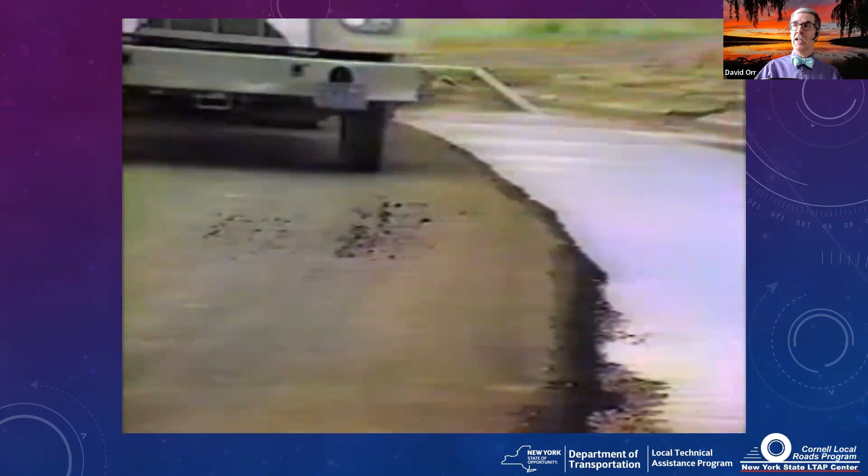The pavement's actually moving under traffic. Every road does this - the more water there is, the heavier the traffic, the thinner the pavement, the more movement you're going to get, the faster that roadway is going to fail. This particular roadway was designed to fail, and they did a good job - it failed in only 81 passes, but it had a high water table and a very thin surface. We need to take care of the drainage - drainage alone would have more than doubled the life of that particular pavement.

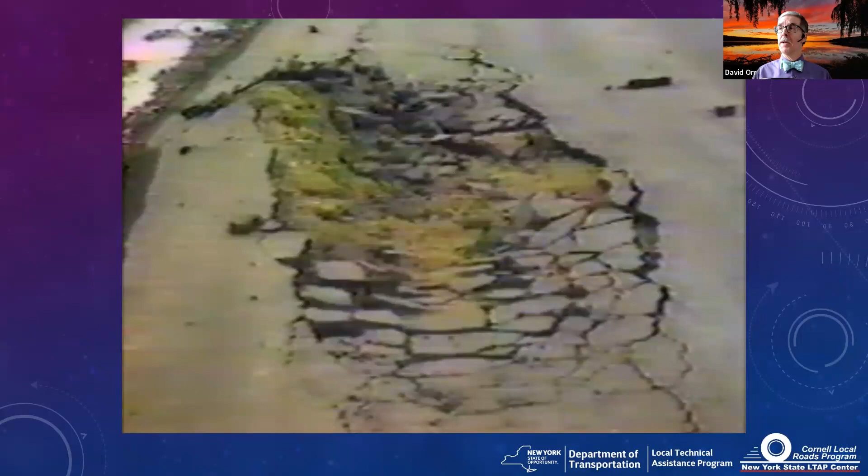You've got to take care of the water. Water is not the enemy, though - it's excess water. For our one hour together we can't cover this a lot, but we can certainly cover it in more detail in the full day workshop. Now, one of the biggest things we have to make sure of is that we've got a good crown on the roadway - got to get the water off. If the water can't get off the roadway, it's going to go into the roadway, and you're going to have excess water. That's going to lead to premature failure.

Now, in terms of the kind of cross slope we'd like to have, well, it depends on the surface type.

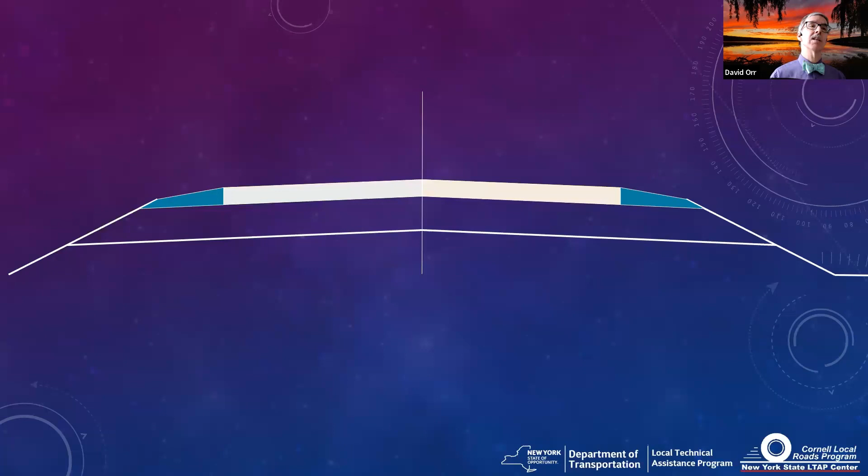So I told you I might ask you to raise your hand. How many of you have gravel roads in your system? Raise your hand if you've got gravel roads that you manage. Okay, we've got... not quite a quarter of you so far. A little under a quarter. Getting close to a quarter. Okay, so about one sixth of you have some gravel roadways.

For a gravel road, you're going to need a steeper cross slope to move that water off to the side. You're going to want about a 6% cross slope for a flat, straight section of highway. For those who care, that's three quarters of an inch per foot.

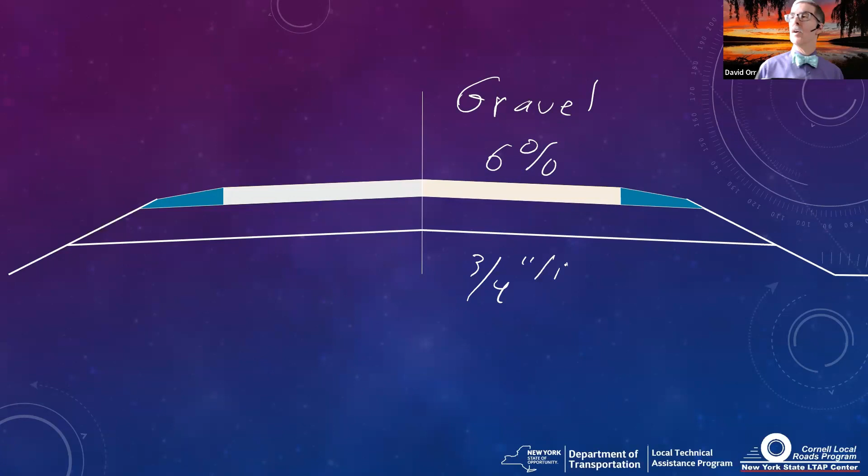But if you've got a paved roadway, you don't need to be so steep. In fact, if it's too steep, you'll get erosion at the shoulder. So typically we say 2% for a hot mix, maybe 4% for a chip seal or cold mix. And of course the shoulders should have additional slope. For those who care, 2% is a quarter inch per foot, and 4% is half an inch per foot.

One of the things that's cool is whatever the surface, the same cross slope can be used for the subgrade and it'll still carry the water. It does make a difference. You definitely want a cross slope on those lower layers. This is very important for a couple of reasons, not the least of which is drainage, which is what we're talking about today.

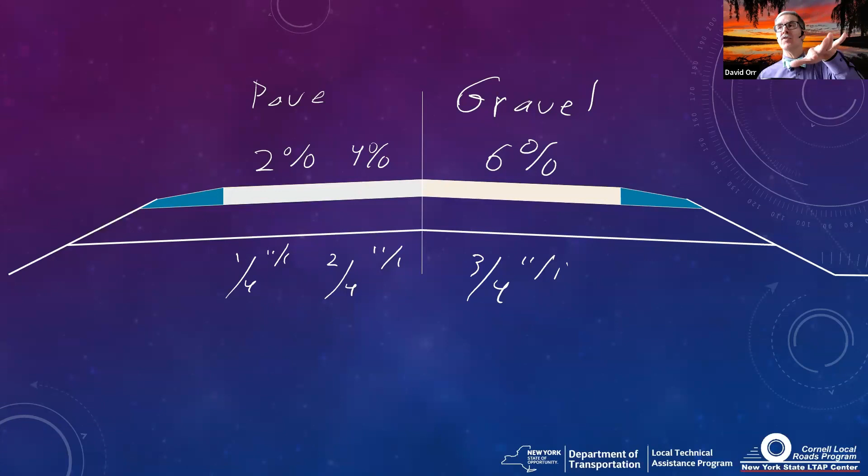You don't have that crown, you don't have that cross slope. Somebody has come in and flattened it, or you've transitioned around the corner and made a flat spot, or made a bread loaf shape where you've got a flat middle and steep sides. Anytime you get a flat section in a gravel roadway, you're going to get potholes. They're much more likely to form when you've got a flat section of highway.

You've got to have a crown. There's nothing in the rules that says you can't have a crown going all to one side if need be, especially on a gravel roadway. Obviously it would depend on the width, but you've got to get that water off.

Now, if you're interested, if you really want some good information on gravel roads, we have some links on our website, we have some videos. So if you have gravel roads, for the six of you that do, there's some pretty cool stuff out there, and there's lessons to be learned.

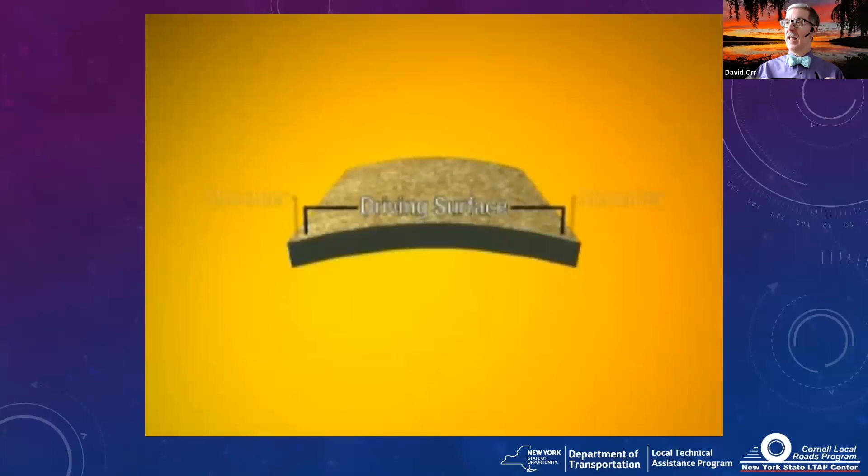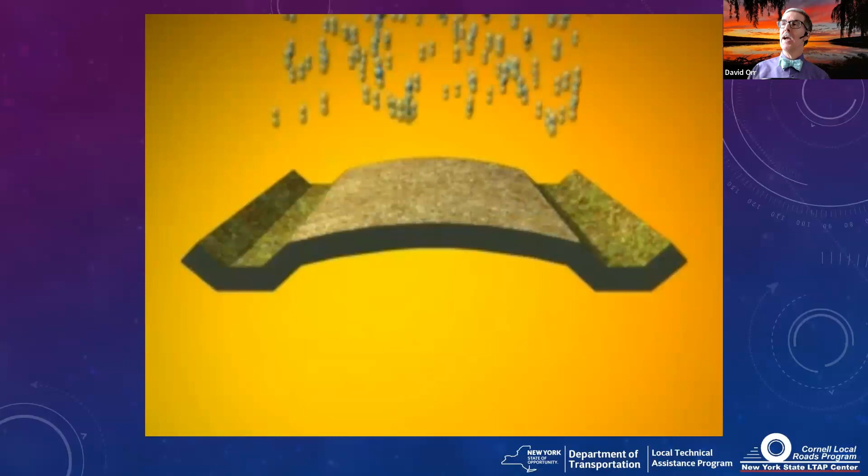Now, one of the biggest things with a gravel road is you've got to have the correct shape. Here's an illustration from our friends at the South Dakota LTAP Center. A gentleman who's since retired, the guru of gravel roads, talks about the danger of having that flat top surface on the gravel roadway and the quality of the gravel throughout this particular DVD. But you've got to have the same drainage pattern on a gravel road that you have on a paved road, though you'll have a slightly different surface because of the way water runs off that particular surface.

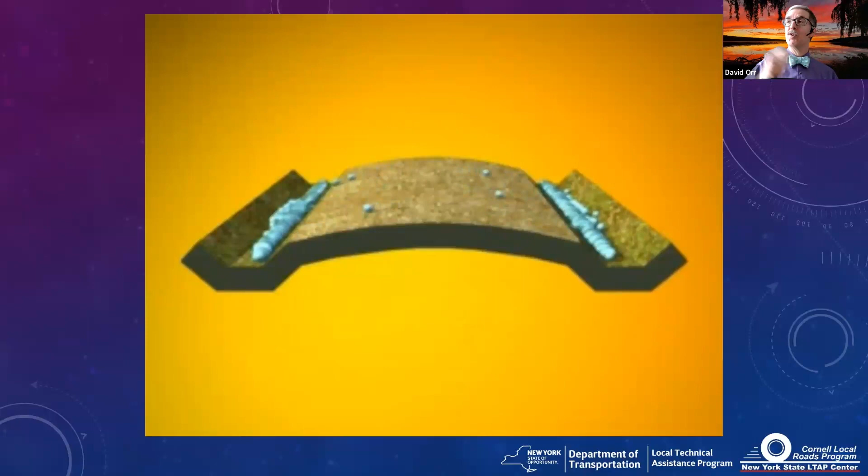So keep that in mind. And of course, we always think about safety. When we do drainage classes, we think safety. We do safety classes, we think about drainage. Those two things really are important to think about.

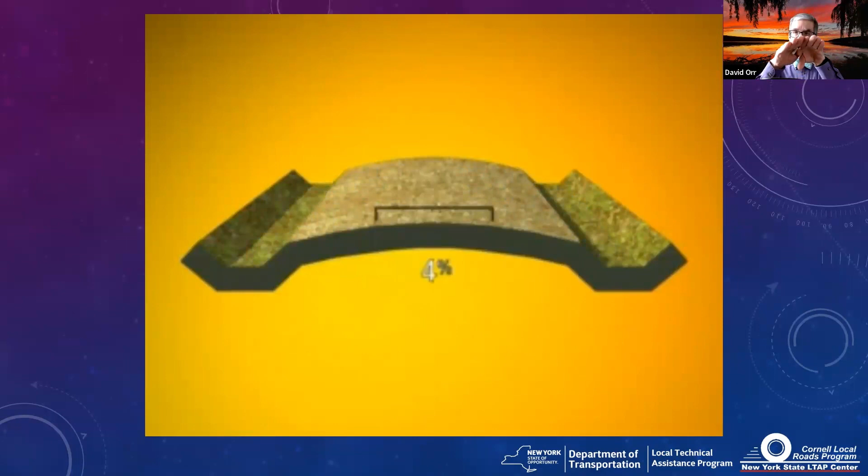So again, make sure you've got a good crown, make sure you've got a good slope, and especially on a gravel road, don't get yourself a flat spot in the center, or you're going to leave yourself potholes. Heck, even in this video, they sort of show a rounded shape, which tends to lead to potholes.

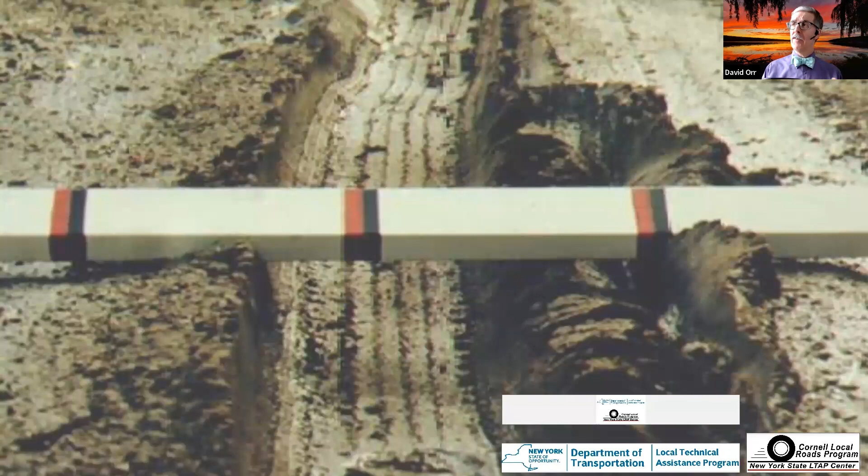You can see it's pretty deep. The only saving grace, the only reason I didn't get in worse shape, was I went slow. I went back and checked, there was no gravel in there. The material had clay, mostly silt, and a little bit of sand, but there was nothing larger than a quarter inch in the whole pack. It was just a mess.

So when you're looking at your roadway, you really need good quality material. We spend a lot of money on asphalt, and asphalt is not cheap, yet the real money needs to be spent on the gravel, because it's cheaper and easier to manipulate. Part of the problem, of course, is getting good gravel, and that is getting harder.

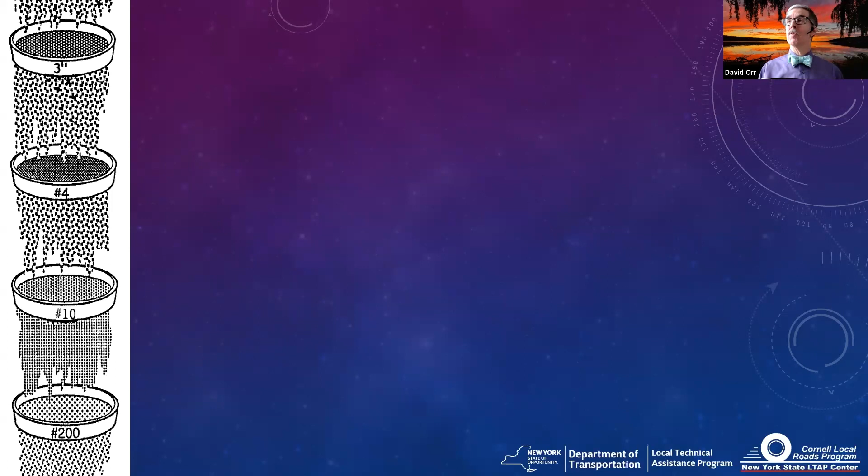If you look at it from the standpoint of your gravel, sand, and your fines, silt and clay combined, essentially what you need, no matter what, is about 50 to 70% gravel, okay? So that's this section over here. You need 50 to 70% gravel. That's the good stuff, that's what you drive on, essentially the 1/4 inch to 3 inch material.

Those are the rocks you're actually driving on. Even in a hot mix pavement, you're driving on rocks, okay? You need about 25 to 40% sand, to fill in the voids, still pretty good for drainage, good shape, right?

Now, in terms of silt and clay, you need some in your gravel roads. Those who raised your hands earlier, for your gravel roads, you need some silt and clay because that's your binder. That's what's holding it together, because in a dry period, if you don't have that, traffic is just going to cause it to ravel and move, creating washboards and other problems.

The problem is those fines hold water. And if they hold water and you cover them over with a surface, that water can't go anywhere. It can't evaporate out, and it just sits there and becomes excess water, and the roadway becomes too soft.

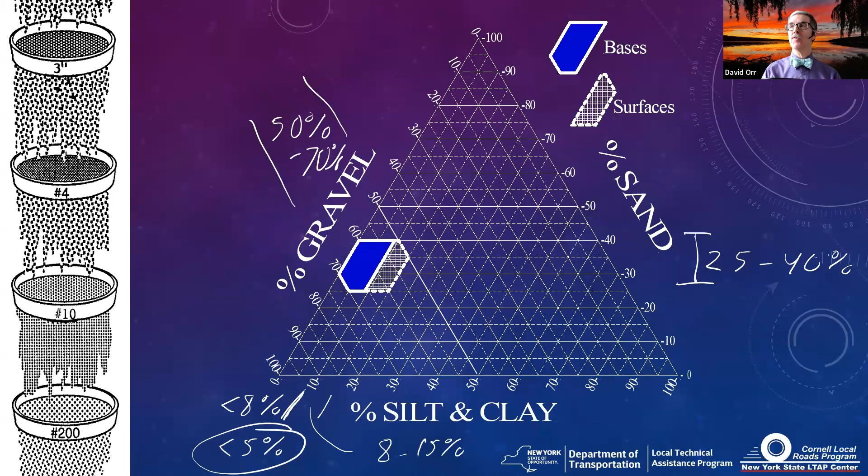You might find your fines content is higher than you'd like it to be. Okay, absolutely vital for a good roadway. And with the proper drainage on the side and the proper material, roads can last for a really, really long time with a relatively thin pavement.

And of course, as you'll hear next week in the pavement maintenance webinar, and by the way we have that workshop on the road as well, you've got to do those treatments sooner rather than later. The treatment here is not to overlay this. It's too late.

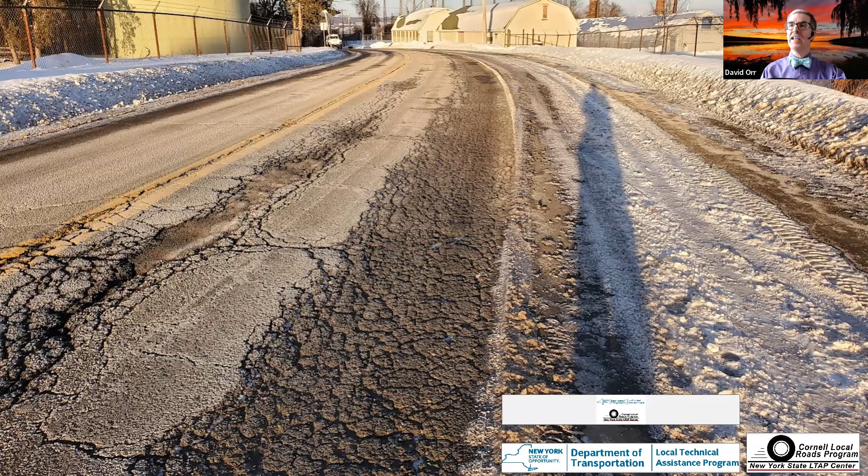You're really going to have to grind that material out, check the drainage underneath before you do anything on top, because those cracks will come right back through. About 1 year per inch for your overlay, and at over $100,000 per inch per mile, that's a lot of money.

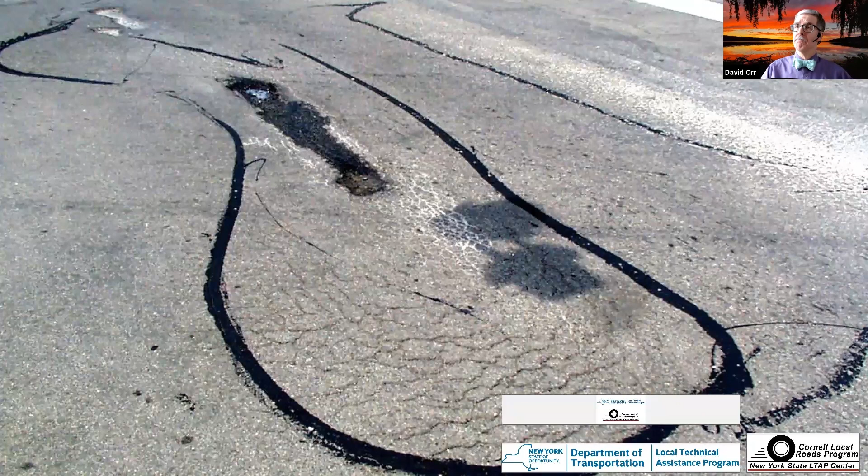Okay, so this photograph was taken on a road. I won't say where the road is, but in the Q&A, somebody tell me what you think the agency who owns this road did the day after I took the photograph. See if somebody in the Q&A wants to tell me what they did the day after.

They filled the pothole. They should have filled the pothole. They didn't. They should have patched it. Resurfaced. Somebody got it, yeah, they resurfaced it. They overlaid the thing the day after.

And the worst part is, the part that some of you caught, is the fact that, let me get a color you can see. I'm going to go with yellow. Okay, right there, that's not just a pothole. That's actually water, there was actually water coming out of the roadway, and they overlaid it. Of course, it came pretty quickly, just a few years, and it became a pothole again.

Okay, I'm a huge fan of crack repairs. We don't do enough of them. This is not a good candidate for crack repair. As you'll hear more about next week, and if you come to the workshop, you've got to have relatively thin cracks. You've got to get to them sooner than you might like. It's absolutely vital to do the right repair at the right place at the right time, and to do it well.

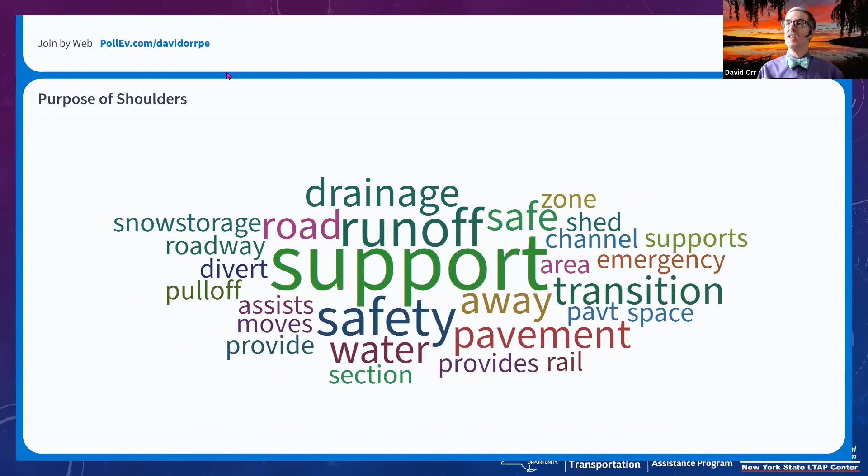Number 1, they provide lateral support. Compacted shoulders hold the pavement in. Otherwise, you get edge cracking on the asphalt. Even in an urban area with curb and gutter, that properly placed curb provides lateral support for the pavement. Number 2, it moves the water away from the roadway into your slopes and stuff like that.

In fact, let's go look at a good shoulder when we talk about this. And then, obviously, we've got the issue of snow storage, in most winters we have to deal with snow. But I'm glad somebody put safety in there. Shoulders are a part of the safety of the roadway because, let's face it, people get off the roadway. They're driving with this tool in front of their face, okay? They errantly pull off. One mistake shouldn't lead to a serious crash or fatality.

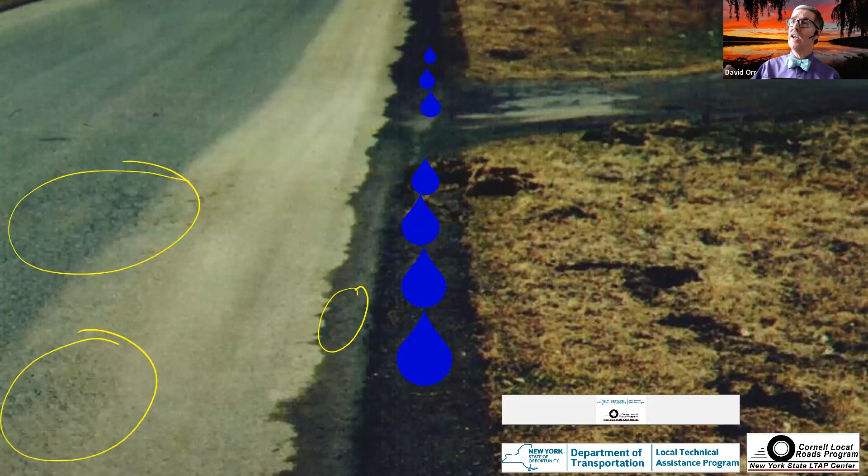You can actually see where the edge of the snowplow was, but you can see the water is actually going back under the roadway. You can see that it's saturated here, okay? You can also see, if you look carefully, there's a couple of spots that have already started to crack. Very light, fine cracks, but those are going to be potholes relatively soon. And then, of course, all this debris.

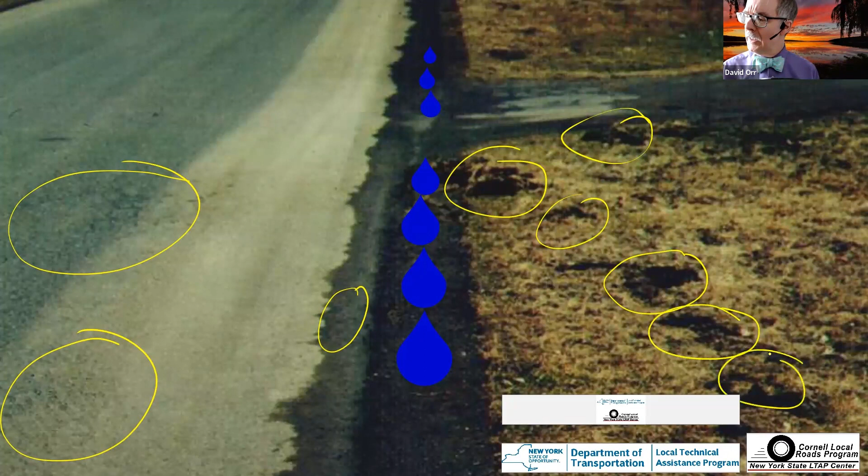Before I was with Cornell, I was with Yates County. And there are a lot of things I miss. I really liked the job. One thing I never miss, though, is that phone call from the irate homeowner. And you can't defend that. You can't say, well, you just have to go clean it up. You just have to take it.

So cut their shoulders, get them off the roadway.

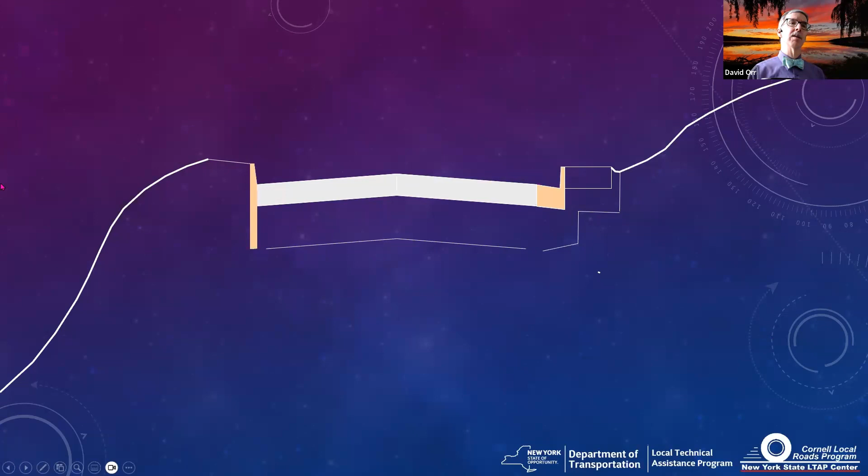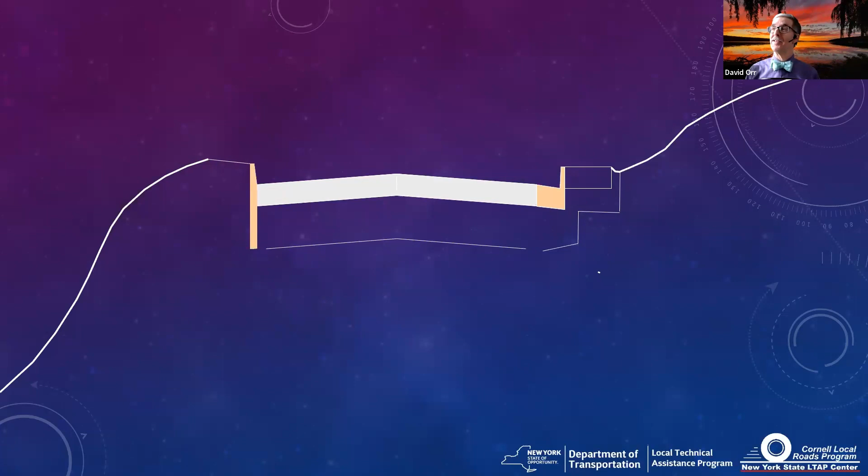How many of you have curb and gutter in your system? Raise your hand if you've got curb and gutter you deal with. And again, you may have gravel and curb and gutter. I'm okay with that. That's actually fairly common, more common than we think. Heck, the city of Ithaca has roads that are dirt and, of course, shoulders and curbs. Okay, so about a third of you are raising your hand that you've got curb and gutter.

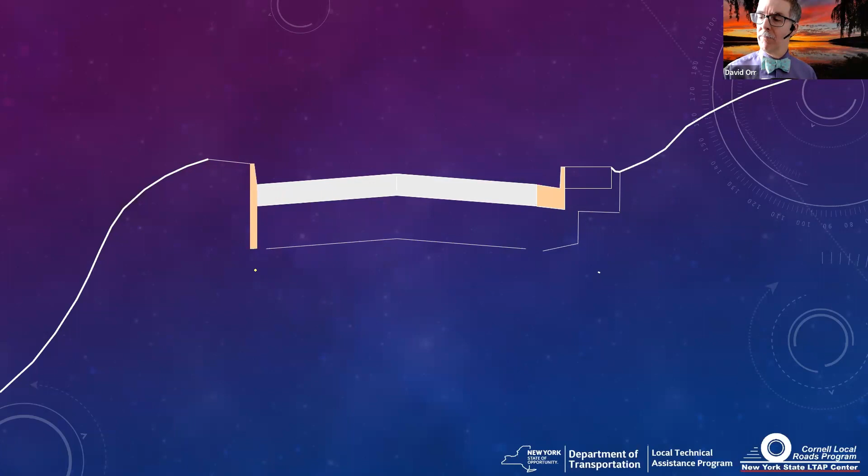Same drainage patterns occur when it comes to dealing with curbs and gutters, okay? So you still want to get water off to the side. So maybe you want to go ahead and put in some subsurface drains underneath, to drain the water off, because you still want that water to go off to the side. You can't put it into ditches, so you got to put it into subsurface drains, okay?

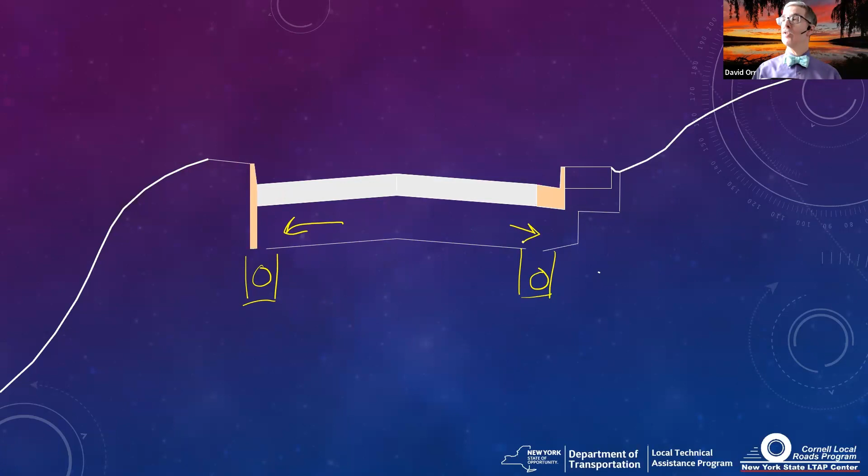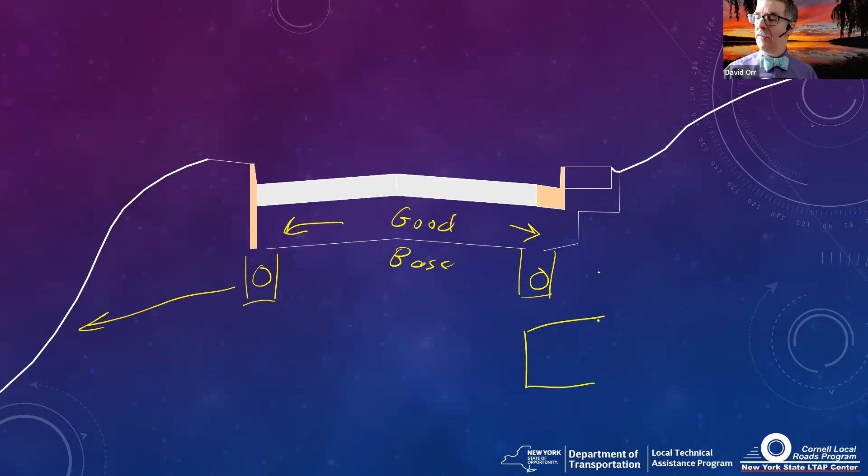You still want to use the same quality material here, okay? So you want to have a good base. You still need to have a cross slope. You still need to take that water away. All the same rules occur. The only difference is with a curb section, where you take that excess water that gets into your roadway is your storm sewer system. So you're going to either have to find a way to outlet these, or you're going to have to feed your subsurface drains into your stormwater system.

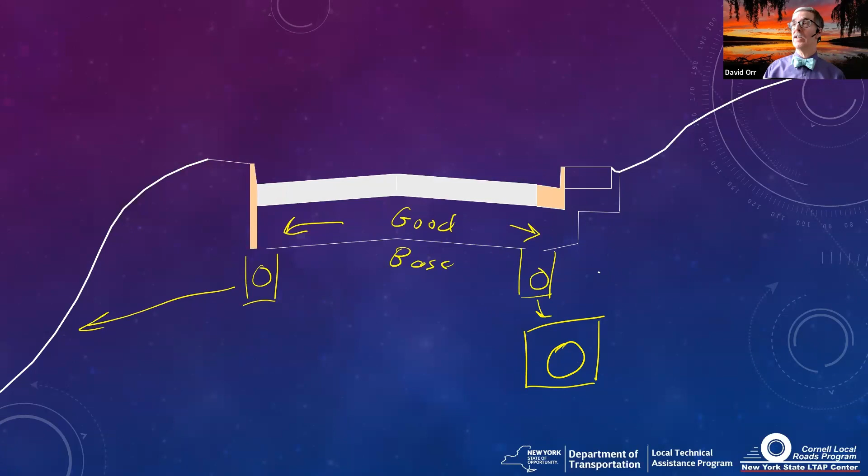Just be aware, however, if you need animal guards, you might want to put some screens or animal guards because the critters like the end of plastic pipes. They go up them pretty easily, okay?

So in terms of the quality of the AC, it doesn't really matter, okay? So now somebody put in the Q&A talking about porous asphalt. We're not going to talk about porous asphalt too much today, but you may have heard that term. Porous asphalt essentially is a special mix that lets water go through it, okay?

It's usually used in parking lots, though if you go up to Lake George, you'll see a whole stretch in front of the beach that's all porous asphalt. They have to have special subsurface catchments to take that water and put it into the stormwater system. It becomes part of the drainage structure.

Has to be designed well. You got to keep the surface clean. There's ways you have to treat it in the winter. You don't want to plug up the pores with sand. It can be part of your drainage pattern.

I wish we had time, but we got one hour together. Something to think about: porous asphalt can be used. We have a couple of parking lots here at Cornell that have them. The big thing there is that they're not huge fans of a lot of turning movements. So in a parking lot, be a little wary. You might want to make the aisles regular pavement and porous where the people park. But it's part of the overall process to deal with.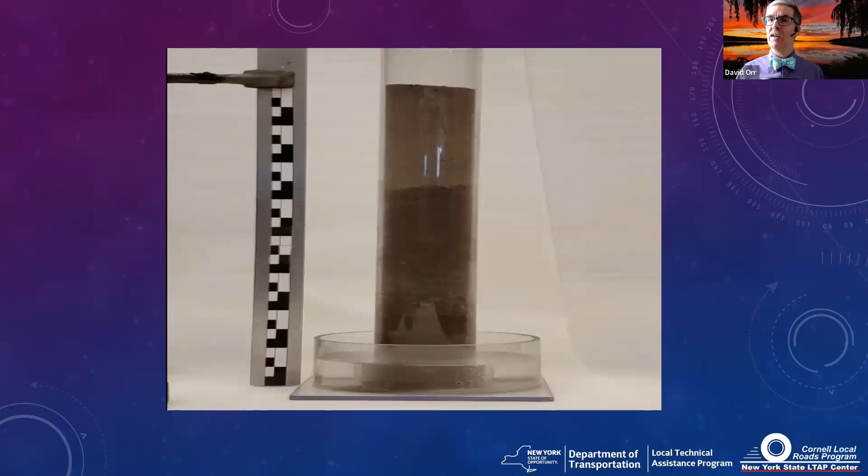Now, just to illustrate this in terms of the lenses of ice, this was done by some colleagues in the Army Corps of Engineers. They have a freezing cabinet and do the same experiment, but this time the top is below freezing and the bottom is above freezing. Watch what happens now to that same water that gets pulled up—remember, the water is getting pulled up from underneath.

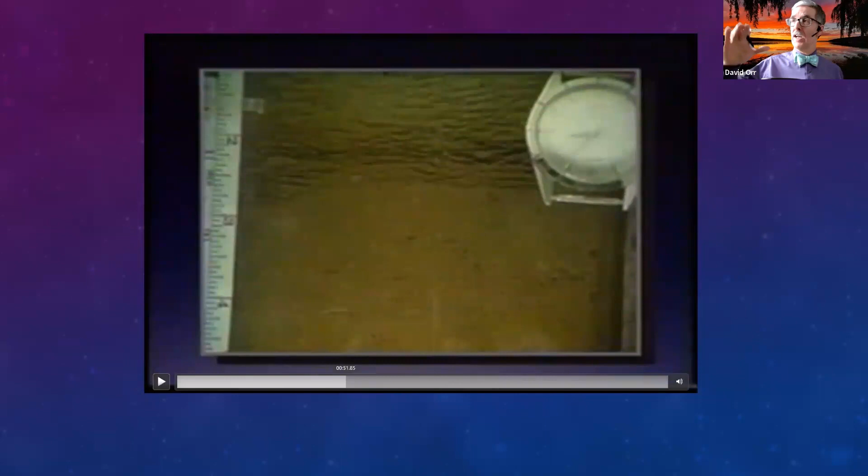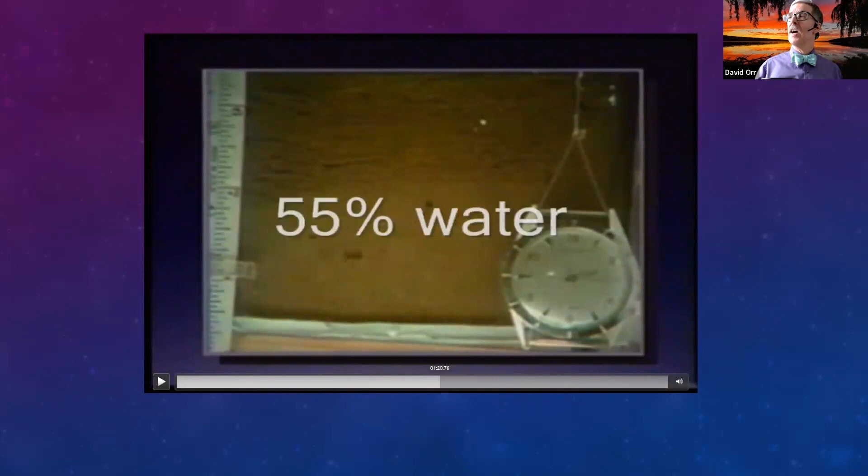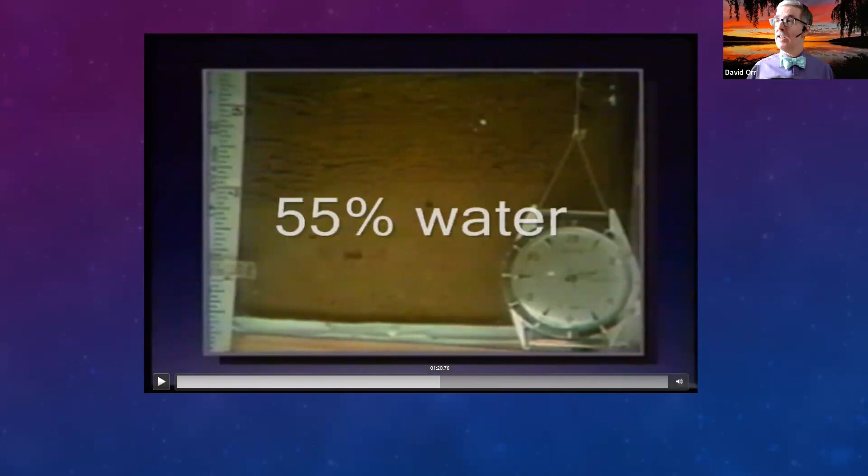Okay, I'm going to skip just a little bit ahead. This starts out at 19% water content. You can see the lenses of ice being formed. And what I want to do is notice at the end of the experiment, they went from 19 to 55% water content. All that's just water that gets pulled up. At best, it would heave 10% if it wasn't for this capillarity issue pulling the water up, and the freezing coming from above.

And then, of course, you can get a lot of heaving, 4 inches out of 6, that's a lot of heaving. But notice, let me go into here.

Now, what roads are frost susceptible? Well, the roads that are frost susceptible have to have freezing temperatures. They have to have the material that is frost susceptible. And lastly, you have to have free water available, capillarity, pulling the water up.

Now, how far does that happen? Well, if you've got silts and clays, it could be feet. A silt will pull water up 5, 6 feet with no problem. Clay even more. So if you got free water near the surface and you got cold temperatures, you can get frost heaves. And you could just put signs up, but we can do better than that.

Now, in terms of what we can do, we have to think about the situations that we're in. This happens to be in Thendara, Old Forge, whatever you want to call it, up in the Adirondacks. I took this photograph coming back. The state had just paved the roadway.

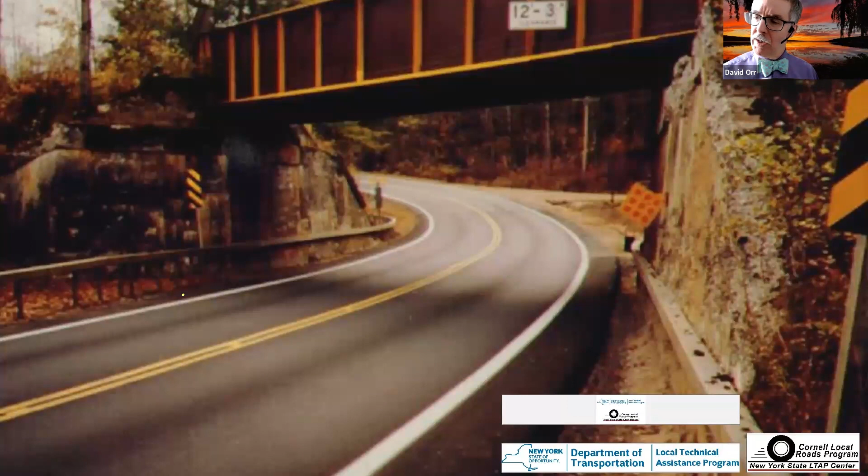Now, this is a tough challenge. I always thought the state had a really almost impossible challenge, because if you know this particular site and just look at it carefully, I'll help you out, you can actually see there's a culvert that runs diagonally right there. It's a shallow culvert, a box culvert actually. It's not moving when frost heaving occurs. It's not going anywhere. The problem is the ground around it, the subgrade material, the native material, tends to heave and move, especially in the winter.

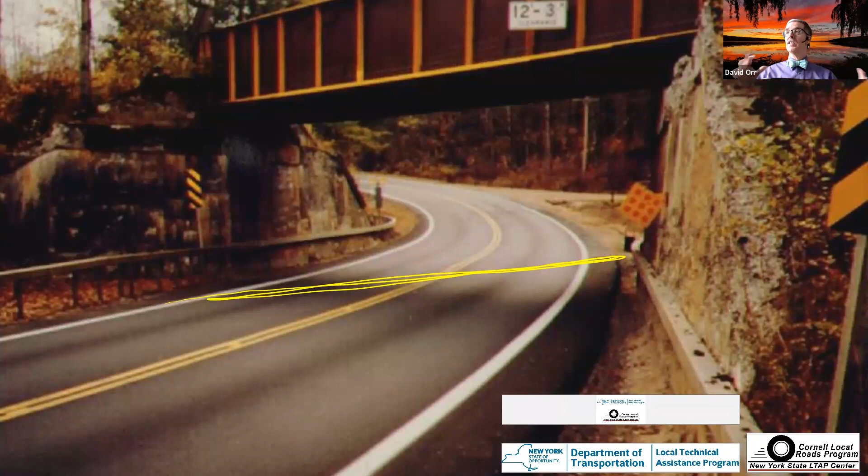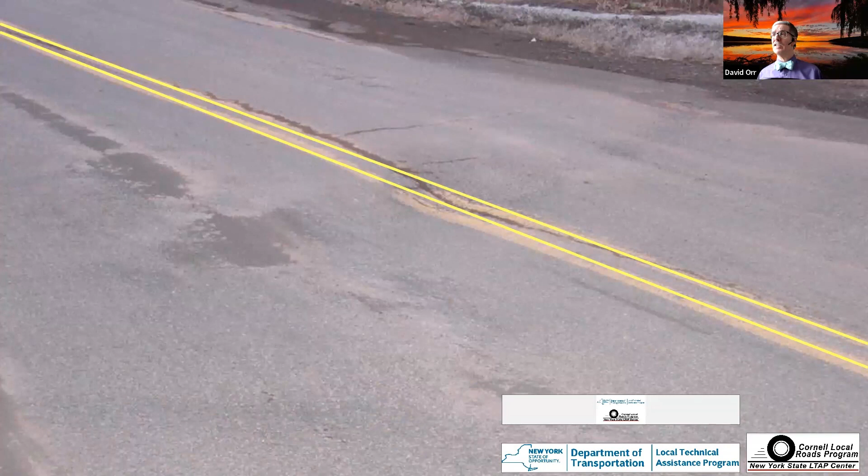And this can occur for a lot of agencies. Here's an example of one on a town road. Actually, it might even be a county road because it does have a yellow stripe on it, but I don't think they painted the yellow stripe with a dip in it. It occurred because of this capillarity creating frost heaving. The culvert didn't move because we backfilled it with good material. The road around it moved, and we get a problem in the winter.

Now, how do we solve this? The best thing to do would be to use non-frost susceptible materials. That would be optimum, we'd love to do that. And non-frost susceptible goes back to our chart, that's why I showed you the chart. What we found was if you keep that fines content less than 8%, most of your frost heaving problem goes away. Most, not all, but most of it. Now, of course, it still holds a little too much water in some cases, which is when we really like 5%, but 8% gets rid of most of the frost problem.

But if we go back up and look at our example with our culvert installation, how you install that culvert matters as well, because if you use really clean material that doesn't move, but the ground around it still moves, you can still get a differential movement. So how you backfill the culvert, use the same material, spread that out with a large excavation. There's lots of things you can do to reduce that frost heaving that's going on in your particular case.

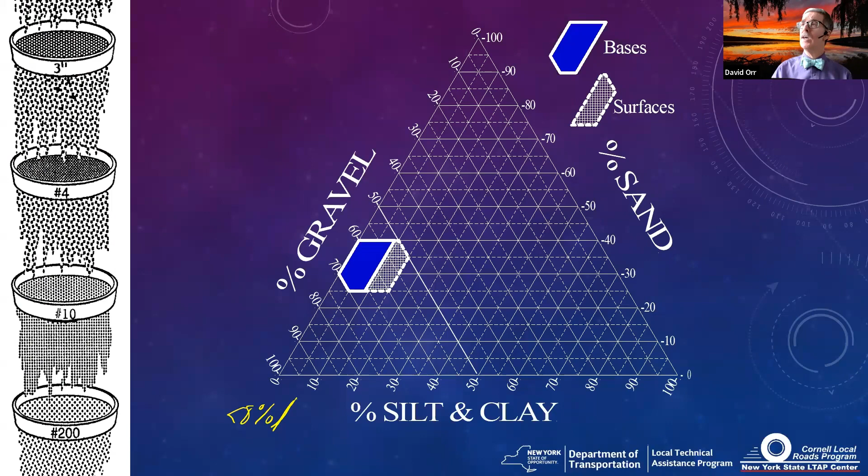Keep these things in mind. Now, in terms of the quality underneath your roadway, another reason we like to have good quality base is we don't want to see this. This is spring. If you've got a roadway that looks like this every spring, with potholes that don't seem to last no matter what you put on the surface, you might want to go and check what's going on underneath.

Check the gravel. Now, when are pavements strongest? That's a question we get asked quite often. Are pavements strongest in the summer? Actually, no. In a normal winter, your pavement's strongest when it's frozen.

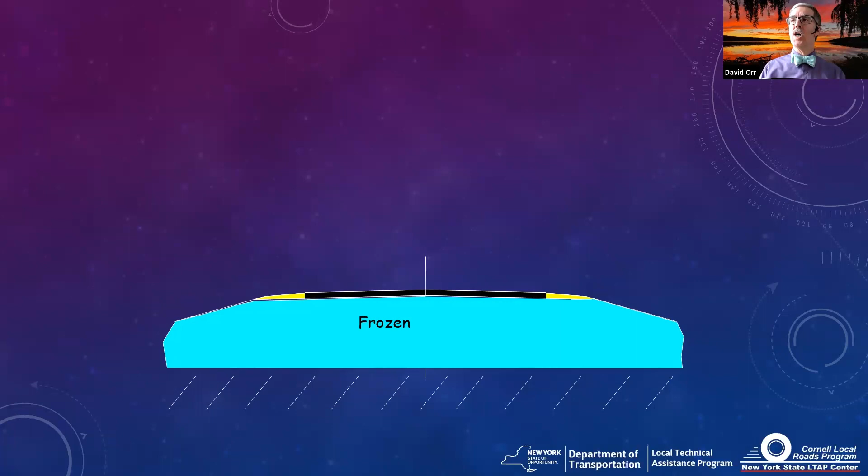You can drive a truck over a lake, and they did that during World War II, and you've probably heard of ice road truckers up in Canada. When it's frozen, roads are really, really strong. The problem is if there's a lot of capillarity, if there's a lot of silt and clay that pull the water up, that water has actually saturated the soil. It's frozen, but it's got excess water. And when it thaws in the spring, it doesn't thaw nice and evenly. All that water sits in the roadway, has nowhere to go until it's completely thawed.

Now, in the Q&A, let's see if somebody can tell me why do I show the shoulders taking longer to thaw than the main line? Which is the most common thing you see. Why do I show the shoulders staying frozen while the center thaws and you got all that extra water? Why do the shoulders take longer? Some of it's due to the sun, it heats from the top down.

More exposure to cold because you've got a black surface and the shoulders don't have that. There's no friction from the traffic, there's no heat from the traffic. There's two more things I'm looking for, let's see if they pop in here. We store snow on it, and that actually helps insulate and keep the pavement frozen. That snow storage can help keep it frozen. Okay, that's one. Blacktop heats up faster.

And then the other one, we did this for decades, it was the standard for many old roadways. Whether it's good or bad, the standard was when you built the roadway, the material in the shoulder didn't need to be as good since there was no traffic. So if I did a cross section, I'd have good material here, pave over that, and put poor quality shoulder material down because it's only the shoulder, right? And then I pave the whole thing.

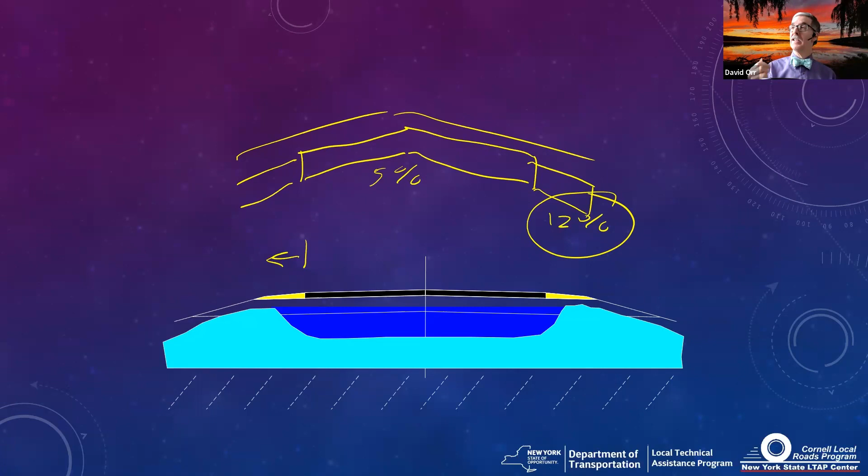Well, the problem is, if this is clean and holds only, say, 5% fines, good clean stuff, but this over here is 12% fines, cheap stuff, the water can't get out, and it's going to hold more water, stay frozen longer. So it's a catch-22. And of course, where's that water going to go? Well, it's going to lead to potholes. It's going to take care of all kinds of issues.

It could do this. We got this picture from Jim Markle out of Albany County. I said, is Jim on here? I wonder if Jim's on here. Let's go see if Jim's on here today. He sometimes shows up. I don't see Jim on there today, but Jim, thank you for the photograph.

This is a frost boil. Essentially, in the spring, you get water coming up and it comes right out in the roadway. And it's pure water. Remember those pure lenses of ice? When they melt, they produce pure water, and that's pure water coming up. So you've got to take care of what's going on underneath.

Now, there are some other things you can think about. Sometimes we have to build across some really soft soils. We know that, that happens. Big deal. There are things we can do. We can spread that out. We could build a corduroy roadway.

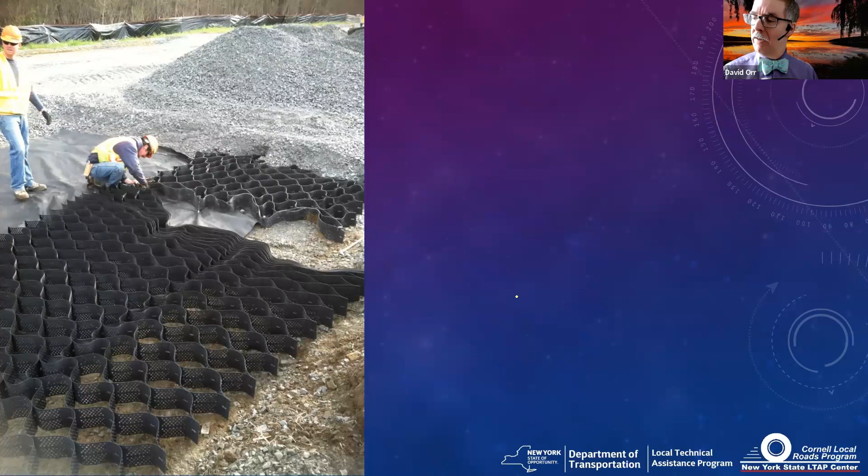This is the modern version of the corduroy roadway, where you put in a geocell and you backfill the geocell with gravel. I actually like that technique, it's a pretty cool technique. The only thing I don't like that I see here, essentially when you're building the roadway, you come in and put in the geocell to spread the load out. So you've got your subgrade, you still want a cross slope on it, and then you put this geocell material down, and then you backfill that with whatever gravel.

Doesn't have to be the nice clean stuff like you see in the photograph, though I'm not sure how clean it really is. The thing we recommend is underneath, and let me change my pen color so you can see what I'm talking about. I'm going to make that light green.

What we recommend is you actually put fabric between the subgrade and the geocell, and go beyond the geocell. Because any fines you've got might pump up and contaminate whatever's in your geocell, and if that happens, or the geocell gets soft, it can actually roll over. So you can see they did put fabric here, but they really should have extended that fabric out beyond the edge of the geocell. Then you fill that in, you build your road on top of it, and it's a modern version of the corduroy roadway.

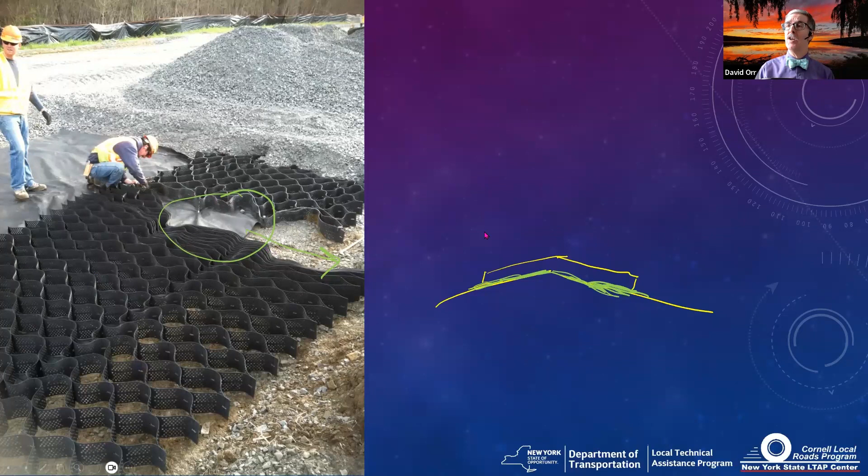Now, you don't have to use fancy geocells. You can just do it with fabric and big rock, a drainage blanket layer. That can actually work pretty well. The biggest concern is you still want to think about drainage and compaction.

In this particular case, the rocks that they used were cheap, but they weren't crushed, and so they really couldn't get them compacted because the subgrade was really soft. So they tried to put in all the rocks, and the green's not going to show up here, so let me change the color. We'll go with black here, because I can actually see that.

They tried to put in rocks that were like 8 inches thick, then they put a gravel layer on top of that, that was at least 6 inches and probably a little bit more. And they tried to compact 14 inches of material. I don't care what roller you've got, 14 inches of material is a lot to compact, and you're not really going to get the compaction that you want. Eventually traffic will finish the job of compaction and you'll get some rutting, because of course it only compacts in the wheel path. So this is something to think about.

Make sure you can construct it. And of course, whatever fabric you do use, make sure you're using the right kind of fabric. There's woven and non-woven fabrics, and again, we can have a long discussion about that. The big key here is make sure it's puncture resistant, and make sure you understand what its purpose is for separating and keeping the fines out of your roadway. Because the one thing you don't want to do, like they had to do in this operation, is dig up brand new fabric. It's a pain. So you really want to put in the right material and do it right.

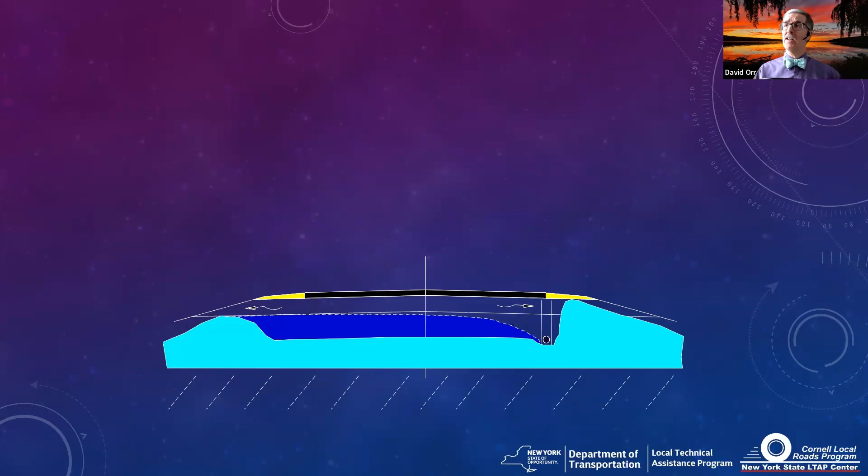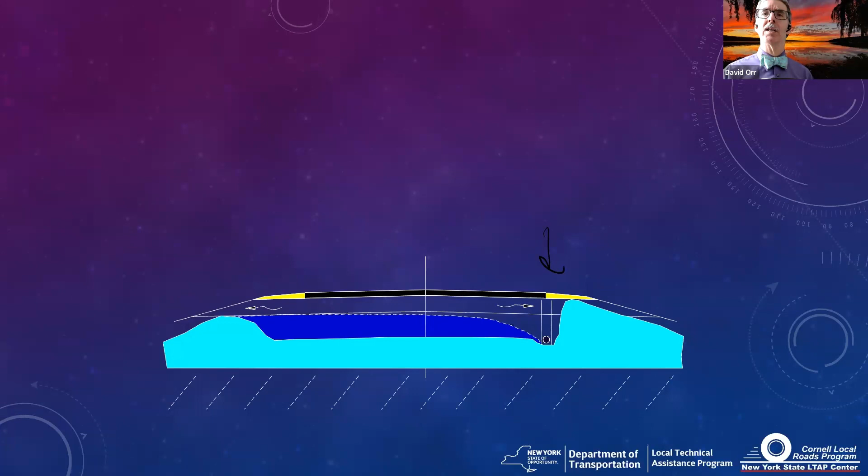Now, one of the things we can think about doing is doing some kind of subsurface drainage. In urban areas, we talked earlier, you have to do that. Subsurface drainage can be very helpful, okay, that you see like right here. Oh, dark black on blue doesn't work too well, does it? Let's change that to white again, or yellow. So a subsurface drain could be very useful right here.

You could also put in the same quality material in the shoulder, a free draining layer. That will help. You'll still get some thawing slow down in the subgrade, but it can really help the base to drain out to the side. And it's cheaper in the long run if you can put it in, if you're not in an urban area or something like that.

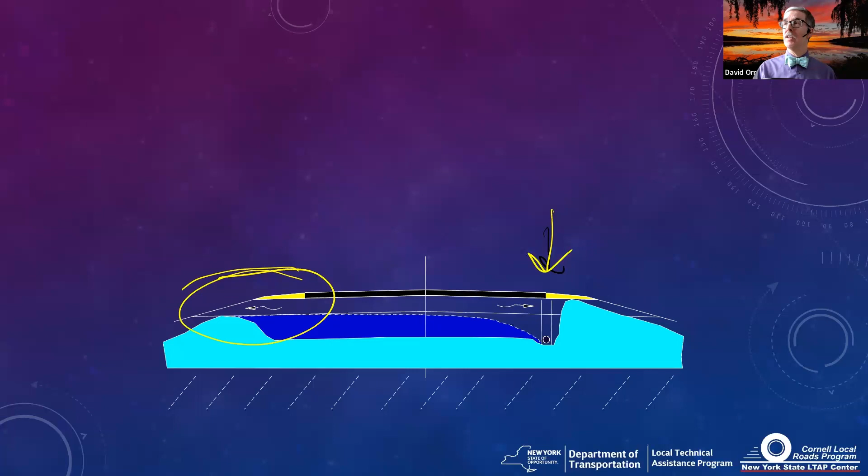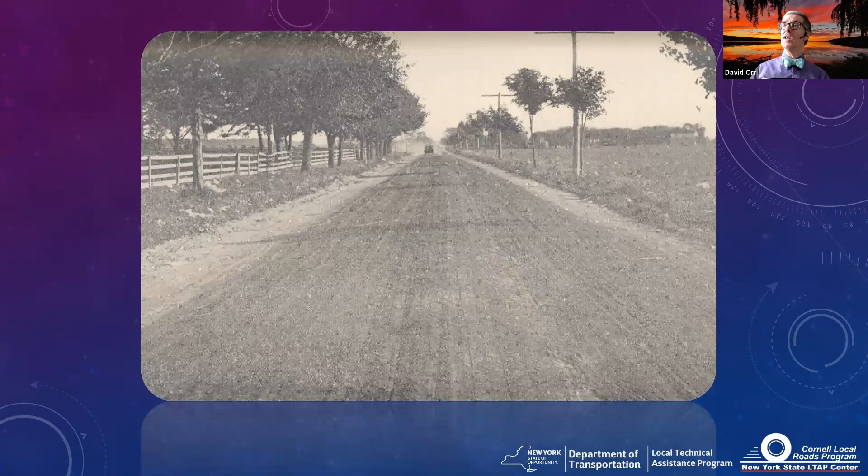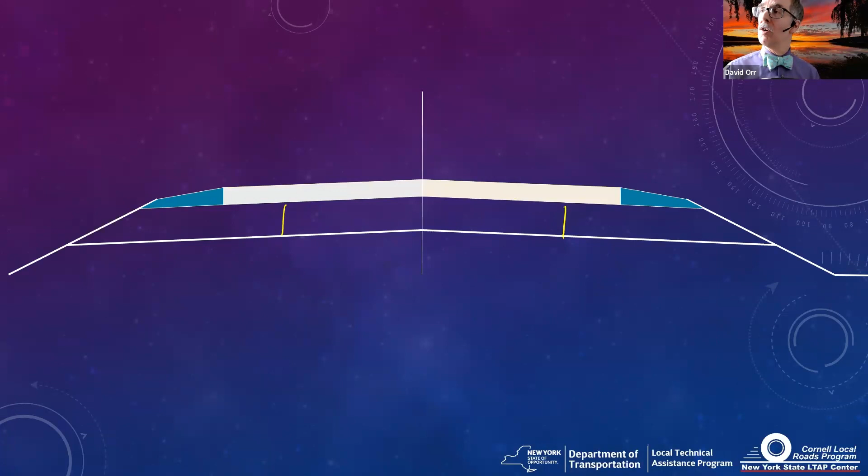The more common problem that we see, though, is that roadways have evolved, okay? Roadways over time have gotten wider. They started as gravel, then we paved them, then we made them wider and wider and wider. And that works great if we widen them properly. But if, on the other hand, the original roadway was only this wide with good gravel, and then this was dirty gravel that we put in earlier, and we just widened it by paving it wider, it looks great on the surface, but the water can't get out.

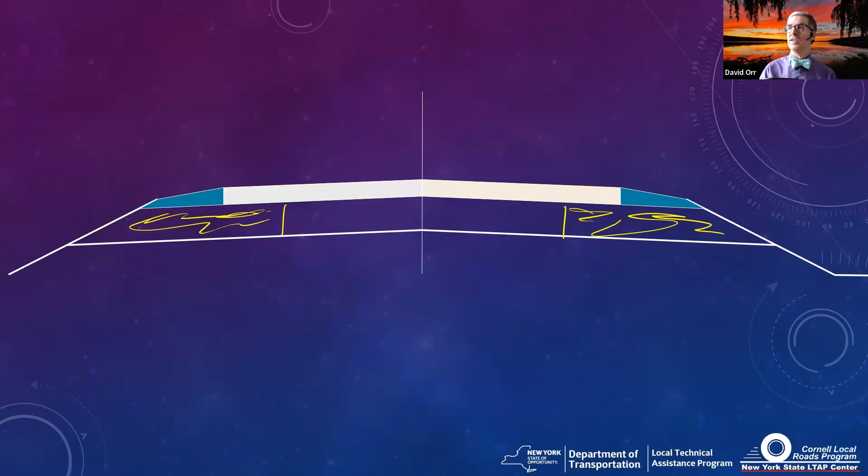It has nowhere to go. It can't get through that dirty shoulder material. And if you want to see what that looks like, there you go, that's exactly what it looks like. Here's a roadway, the center is probably pretty good material. In fact, it used to be a state road before the state gave it as a gift to the county in question. The shoulder wasn't as good, and it breaks down in the spring. You got to get the water off the roadway.

The other thing you might want to think about doing is intercepting the water before it gets to the roadway. A ditch can help to some extent—it will help reduce and lower the water table a little bit—but remember, it's not going to trap everything. And if you've got much capillarity, you can still get water pulled up into your base.

So you may want to think about putting in a subsurface drain. It'd be nice if it could go down to an impervious layer, but even getting down 3 or 4 feet intercepts most of the water and protects your roadway. And if you put it on both sides, you're actually draining out your base as well. As long as you've got a good outlet, you're in pretty good shape. But remember, think about where those outlets are going to be when you're putting those things in.

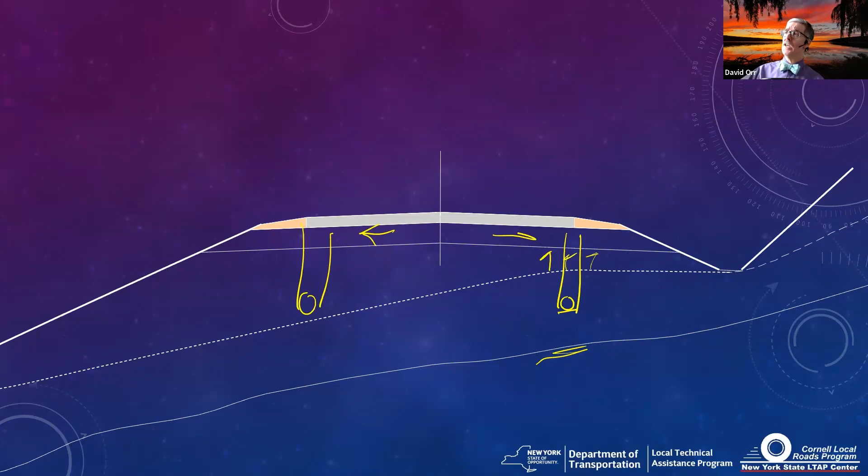So those are all the kind of considerations to take care of your subsurface water. Now, one of the things people do when they put subsurface drains in—under drains, as we like to call them—there's a myth out there that you can put a subsurface drain in and drain out your dirty quality gravel. The problem is that doesn't work really well.

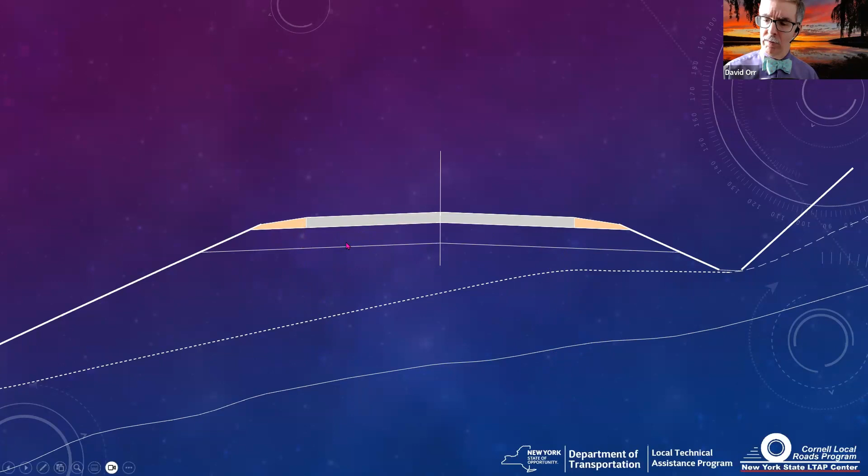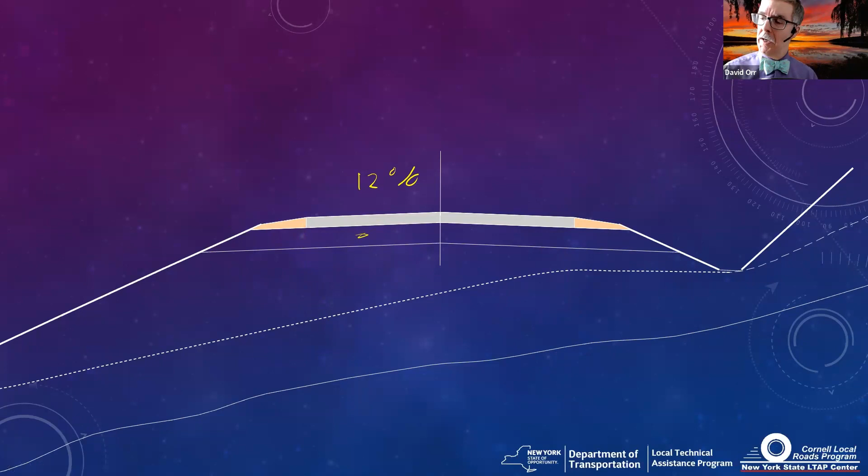If I come in here and I've got a dirty gravel that's say 12% fines because it's been a gravel road, pretty good gravel surface, and I stick a subsurface drain in here—yeah, put one over here too—the water can now drain out to the ditch. So I'll put a pipe to drain that out to the side. Hey, my problem's solved, right?

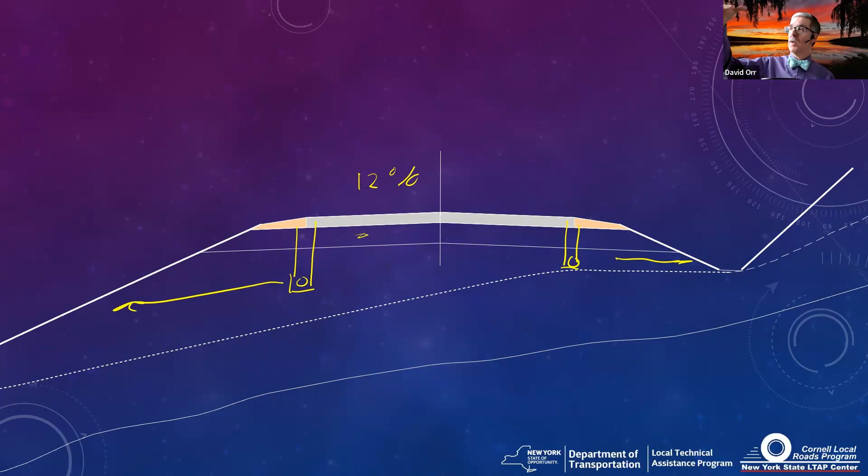Remember, if it's got extra fines, it's going to hold on to extra water. Just think about picking a sponge up—you pick the sponge up, it's still holding a lot of water. You've got a dirty base, too many fines, it's going to hold on to that excess moisture. So sticking the subsurface drain in isn't really going to help us much, okay?

So you really need to be thinking about using good quality gravel materials. If you've got a dirty base, a subsurface drain isn't going to help you.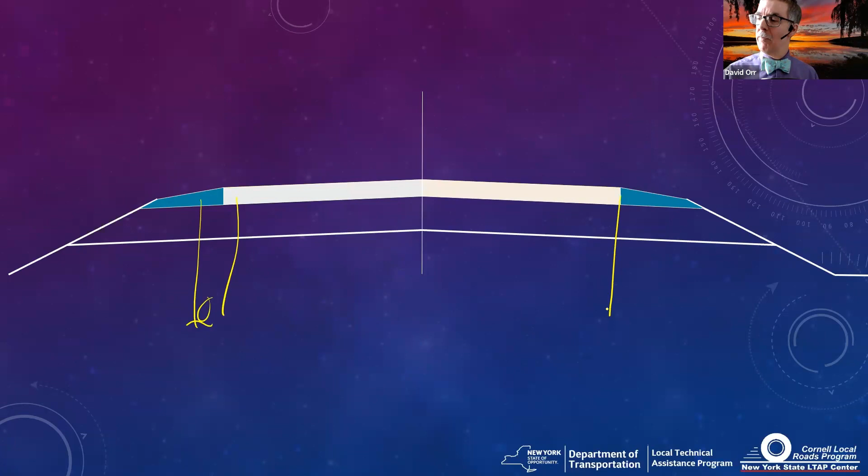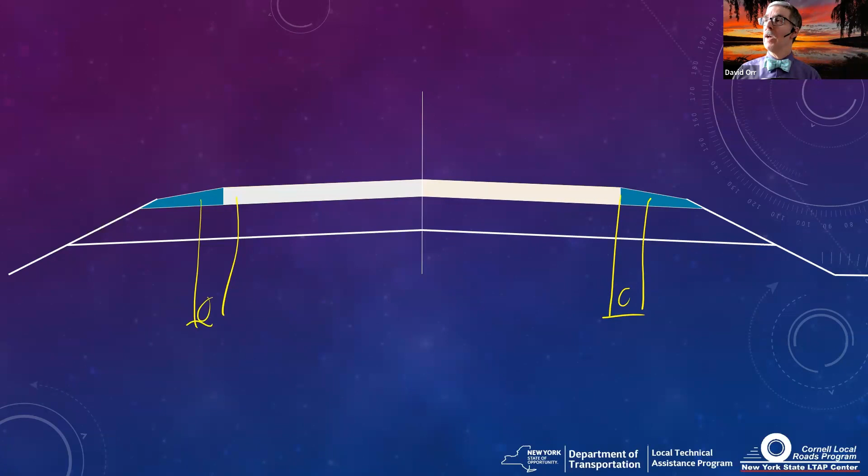And I've seen cases, way too many of them, where someone put in a subsurface drain and there was no water coming out of it the following spring. They put the drain right where you're supposed to, on the edge of the pavement, and yet it didn't drain any water because the base itself wasn't letting the water go. You know a good location because there's water coming out when you put in the proper subsurface drain.

Now, a couple of last little points, and then we'll go to our PDH questions to make everybody happy. If you've got an outlet for a subsurface drain, you do have to think about a few features.

First off, you've got to use the right kind of pipe. If it's exposed to the sun, plastics break down, so make sure the pipe is black. Make sure there's enough drop so the water doesn't flow back up into your pipe. And make sure you think about the fact that critters love these things—their claws are enough, they can go right through the plastic. You might as well put up a little sign that says home sweet home for them.

So think about how your water is getting into your roadway. Make sure you've got a good gravel base and make sure you drain that water well. There's a lot more we could talk about, but again, we've got a 1 hour session that we're doing together.

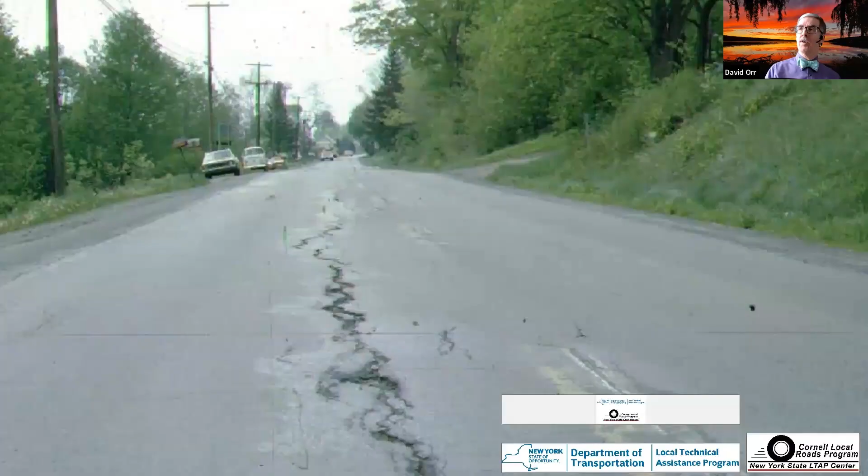And then we go back to the picture. I'm going to ask you, what do you think the problem is and what do you think the solution is? So what are some solutions here? You can start typing them into either the poll, which is active, or you could type them into Q&A if you can't get into the poll.

Remember, it's pollev.com/David Orr PE. And yes, better shoulder drainage might help. Seal the cracks, somebody said. As we'll talk about next week, those cracks are really a bit beyond what's good for sealing.

They're too wide. In fact, you can actually see they've tried to do some repairs on this particular stretch of road already. Find my mouse. Hello, mouse. There's the mouse. Let's do that color a little bit. So these cracks are a little bit too wide, and you can see they've tried to do the repairs.

So let's see what else y'all came up with. Repair the joint and improve the subgrade. Long term, you may need to think about the subgrade. Check the cross slope. Obviously, in a photograph, it's really hard to tell. Think about seepage. Capture the water coming from the hill.

Absolutely, one of the most important things. We see this a lot in these side hill situations. The original ground surface is something like this. Over here, this is a cut section. Over here, this is a fill section. And where the two meet tends to be a place you get movement. In fact, this is actually a frost-related crack, even though it happens to be in the wheel path.

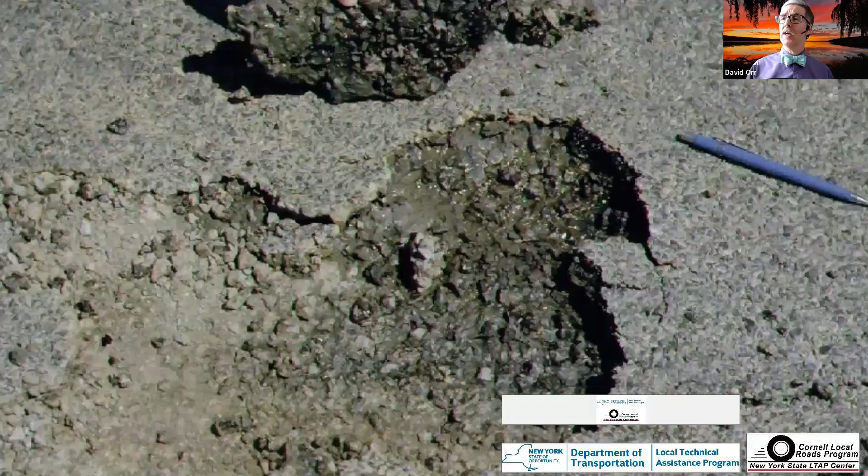Yep, maybe excavate the center. Yeah, there's all kinds of things. Let me show you this picture. Come over here, clear the responses.

And then now I'm going to have you tell me what you would do here. You see this? What would you do in this particular case? What do you think the problem is? If you can figure out what the problem is, you got to say, where's the water coming from?

Absolutely, one of the first things to do is, look, maybe an underdrain. That's a good possibility. Maybe a better subbase. Outlet the water from underneath the pavement into the subbase. We got two competing camps here.

Okay, let's go back and look at our photograph and let's just ask ourselves. Let's just say we get there and we go, we got a sub-base problem. Let's replace this. We'll box it out. We'll bring in some good quality gravel and we'll take care of it. That's one possibility. The other possibility is, we got a water problem. Let's put an underdrain in there and we'll drain that water out. We'll take care of the problem.

Here's the issue. If this is a dirty gravel that's underneath, that's led to this. If it's a dirty gravel, and you come in here and you put in a subsurface drain - I'll just put the word drain down - remember, the drain's going to drain clean material.

But if it's dirty material, you stick a subsurface drain in, it's not going to pull any of the water. If on the other hand, you said, well, we got a dirty base, let's box it out, we'll put in some new gravel - the real problem happens to be that you're on a side hill situation and the water's coming through the clean gravel. You just replace clean with clean, you're still going to have a pothole. The solution needs to match the problem.

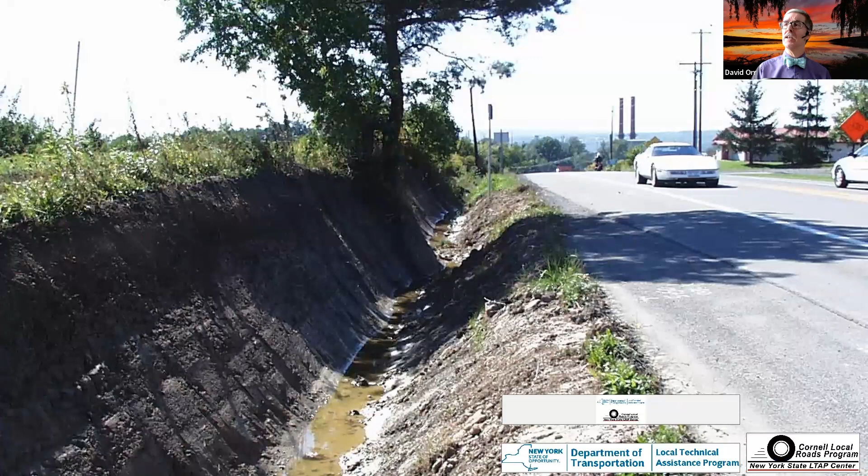One last one, and then we'll be right on time and get you out of here. Hope this is a pretty easy one for you. I'm not even going to do a poll, let's just see what somebody in the Q&A can tell me. What do you see here?

It's not safe. Somebody thought, well, we'll improve the drainage by making the ditch too deep. It didn't really help the drainage, and now it's a safety issue. We can talk about a lot more issues when we're doing the full workshop. I just want you to think about water, and think about the fact that a lot of drainage and safety actually go hand in hand.